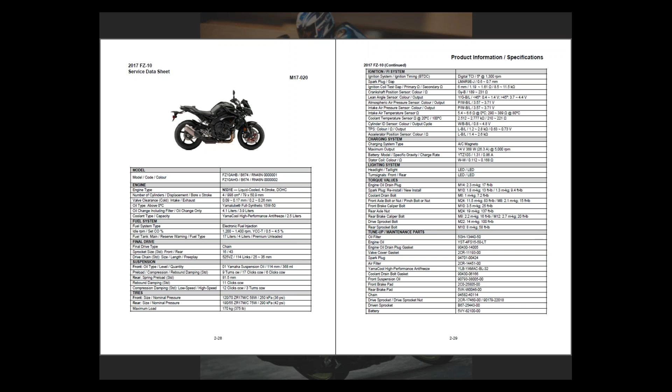In Section 2 is your product information and specifications section. It is unchanged from most other years. You can see a list breaking down each individual model, and it covers your general specifications for engine, fuel system, suspension, as well as tune-up and maintenance parts. You'll notice this year we've changed the order from CC to exactly the same order as the sales list. It's a little detail.

Thanks. Now we'll get into the new model information section. These are the units that we are going to cover: a couple YZs, the SCR 950, the new FZ09, the R1, the FZ10, and the new R6. In your book, this is how you'll see it all laid out. We'll give a quick overview, but we are not going to cover every page within the book. That would take entirely too much time.

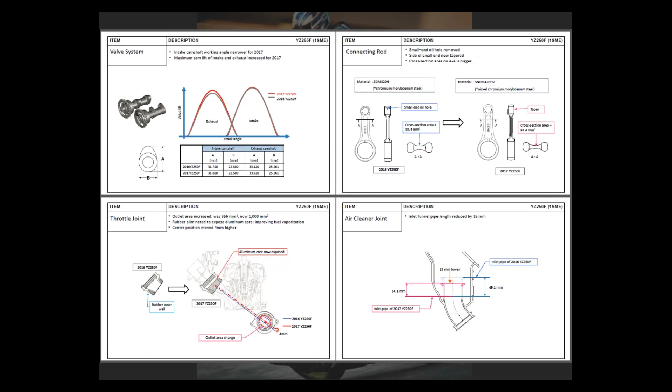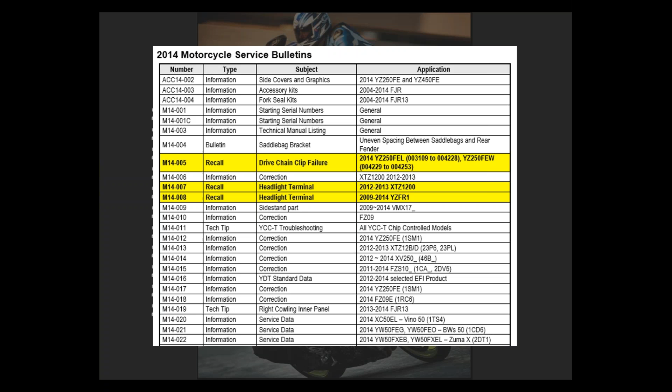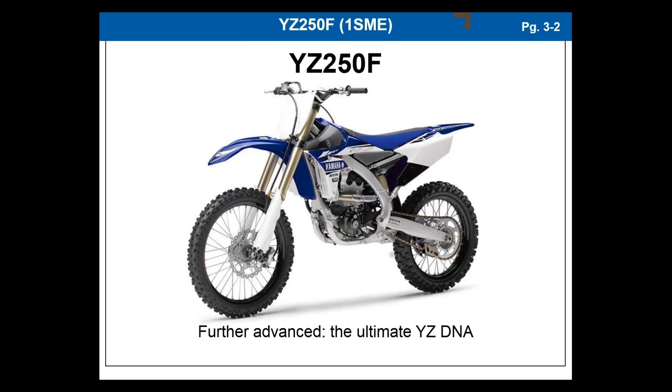Now that we got that over with, we'll move into the new model information. We are going to start off with the YZ250F. A lot of these dirt bikes have been out for some time now, and the new 2018 stuff will be coming out shortly. But we're just going to go through these as a quick refresher to what changes were made for the 2017 model year. So what do we have here, Andrew?

So this is a quick overview of the changes that were made to the YZ250F. Just going around the bike itself, you can see the air cleaner joint length has been reduced by 15 millimeters to improve the high rev feeling. The throttle joint has been moved 4 millimeters higher for more direct airflow. It used to have rubber on it, and that has been removed to improve fuel vaporization. The exhaust diameter and bending radius has been changed to increase mid to high RPM power output. The shift pedal position has been changed to accommodate a new footrest.

The shift cam is changed to improve the shift feeling by adjusting the cam angles in both the in-gear and between the gear shift fork positions.

And the transmission received a few changes, mainly on second and third gear, which were widened because these are the two gears that are used the most.

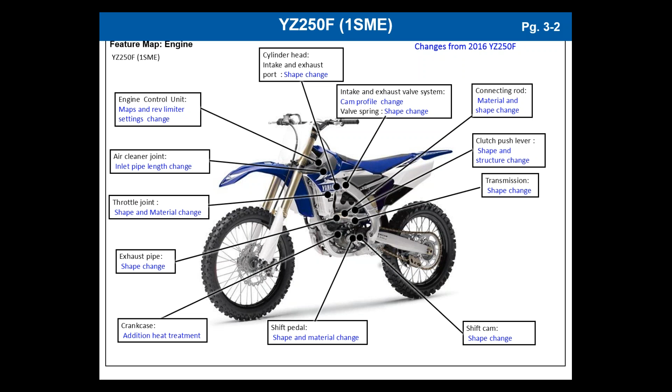The internal diameter of the drive axle is smaller, and the amount of oil holes and grooves have been increased for better lubrication and shifting feel. Finally, the clutch push lever was lengthened to change the mounting angle.

Suspension settings basically change every year, I'm not going to go through that. The engine brackets have been

The connecting rod, the small end, has been tapered and the oil hole has been removed. In 2016, the piston and oil jet nozzle were changed, which allows the oil jet to shoot oil straight at the small end and the wrist pin.

The taper has been incorporated to reduce weight, but also allows more lubrication to get into the wrist pin itself, which made the oil hole unnecessary.

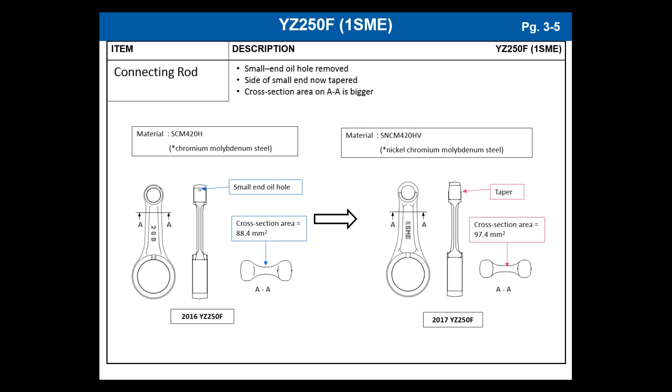After the machining process of the engine cases, a heat treatment is applied which increases the durability. This will improve the longevity of the cases themselves, but the cases are otherwise unchanged and would be able to be used on the previous 2016 model.

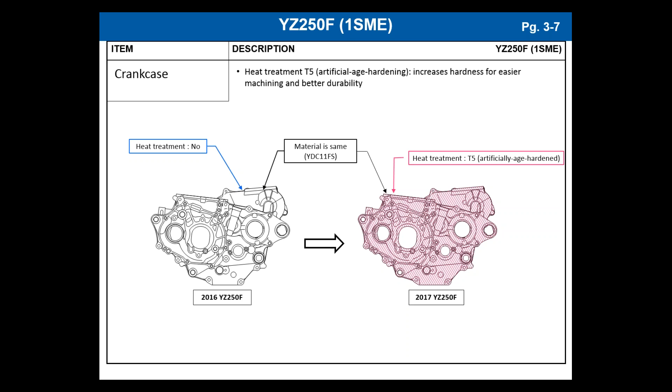Now we'll move on to the YZ450F.

Again, going around the bike, the air cleaner top was changed so that those quick fasteners are now recessed. Riders would catch them on their pants and typically rip them out, so this was changed so that wouldn't happen. The oil strainer has changed slightly at the top for better durability.

The rear brake disc, again, now uses more heat-resistant steel material to match the front disc, and the tread pattern has been changed.

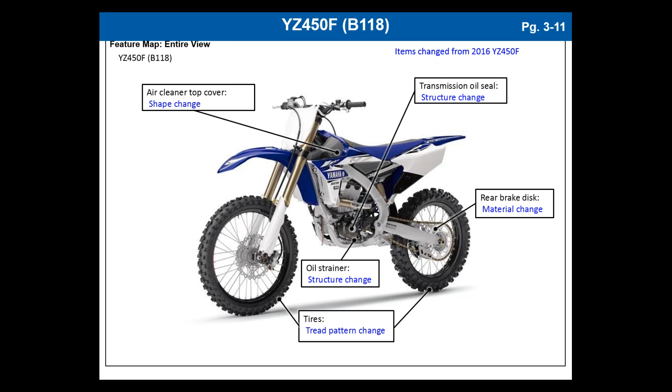This is the one big one we wanted to point out, that the oil seal has been revised to increase the rigidity of the seal body.

So it is even more important that if you're replacing the seal, it does not go in on an angle. Now, Andrew, has that part number been changed? No, the part number hasn't been changed, so it's usable for 2016 and 17. It's just a new spec for the part then, is it not? Yes. Thank you.

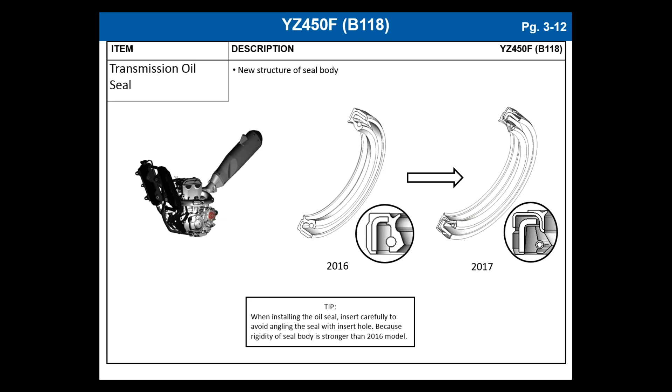Now we have the YZ250FX.

As has been the case for the last few years, the FX makes similar engine changes following the YZ itself. So you can see that there's been quite a few changes, which again had been previously made on the YZ, and we can go over a few of those a little bit more closely.

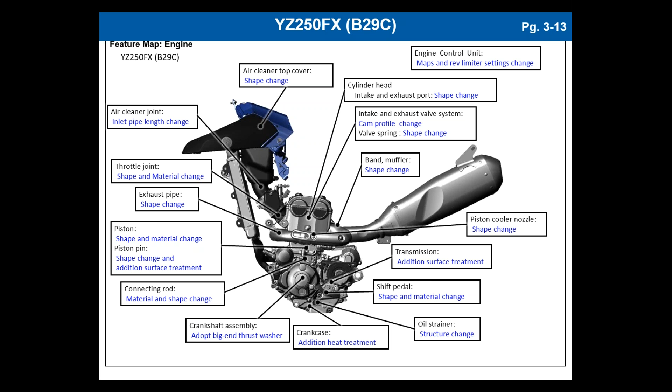But also on the chassis, we've had a few changes as well with the adoption of the WR indicator lamps. The front and rear suspension settings have been revised. The brake disc has been increased by 10 millimeters, which obviously also means the caliper has changed as well.

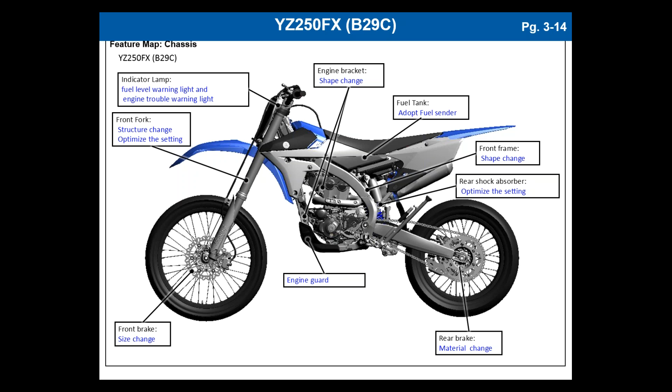The engine guard now comes with the unit, whereas it didn't in the previous model. And the rear brake has been changed, so it's the same part as the YZ, the 2017 YZ. And also the frame is 12 millimeters wider like the YZ as well.

The crown of the piston has been flattened and the ribs have been added on both sides of the wrist pin. These changes result in a total weight reduction of 7%.

Additionally, the replacement duration for the top end has been increased slightly, from replace every 5 races to inspect every 5 races and only replace if necessary.

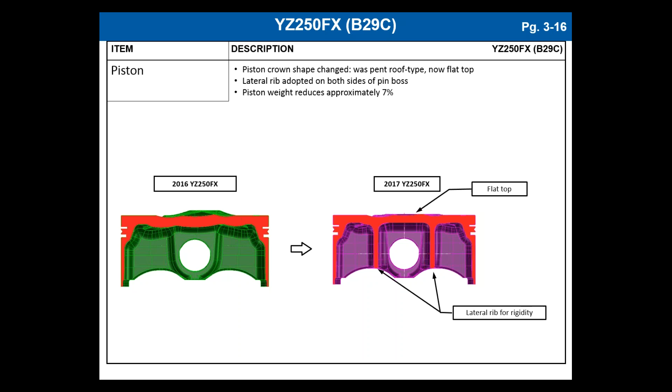So these were the nozzle shape changes that the YZ had on the 2016 model year. Here you can see the oil, where the oil jet shoots more directly to the center of the piston.

This is important because the piston shape changes to get around those ribs, but also directs the oil where it's needed the most, right at the wrist pin.

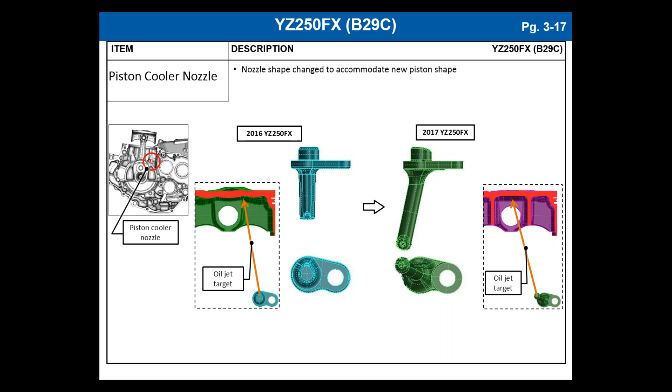So the connecting rod has been changed and is the same part as the 2017 YZ250F, with the tapered small end and the removal of the oil hole.

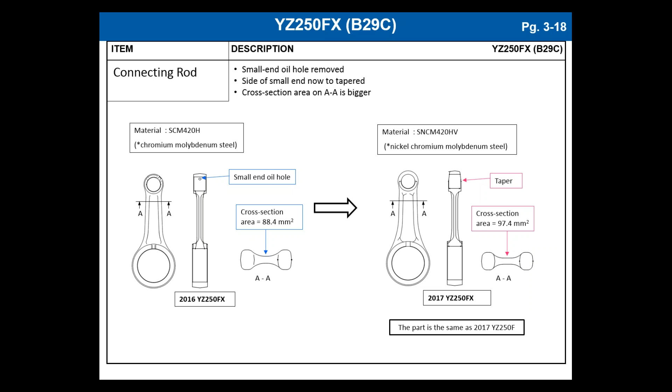On the crankshaft, thrust washers have been added between the connecting rod and the crankshaft for improved durability. These and all crankshaft components are available for purchase individually.

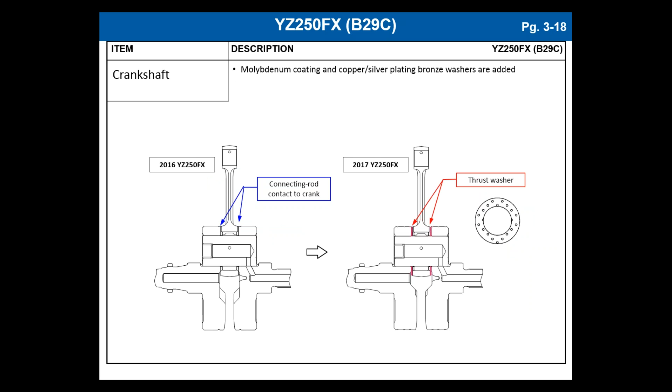The Kickstarter system has been eliminated, which frees up quite a bit of weight. But the kit itself is unchanged and is available as an accessory if the customer would like it.

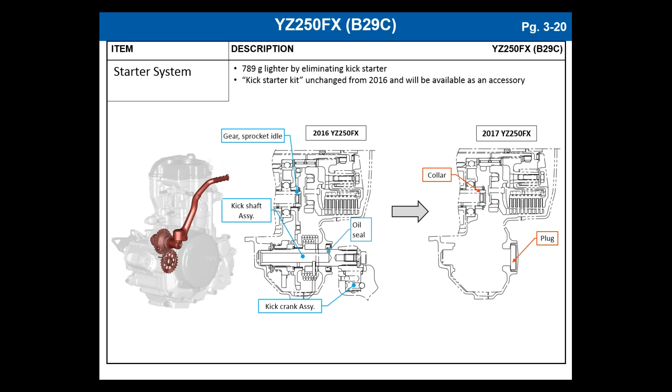Because the Kickstarter has been removed, there's now an exposed area of the exhaust. So the muffler band has been added just to protect the rider's clothing from contacting the exhaust.

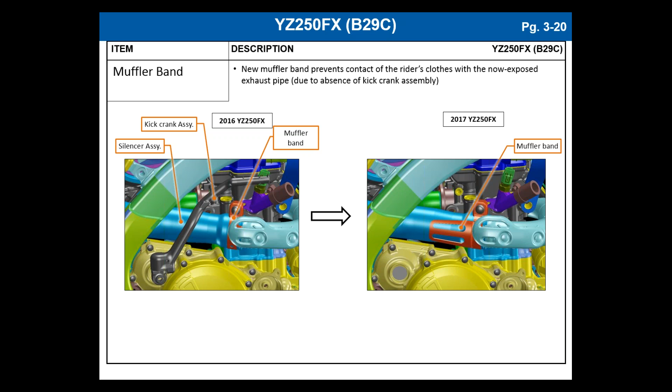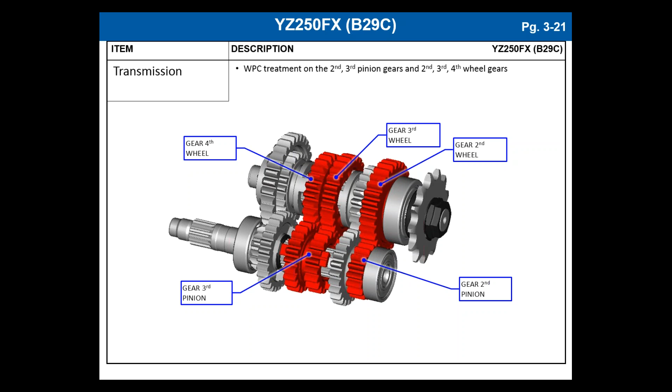The FX is a cross-country racing bike. So unlike the closed course YZ, the likelihood of the FX encountering large mud holes is pretty high. An additional scraper has been added to the front forks to improve cleaning performance and reduce seal wear.

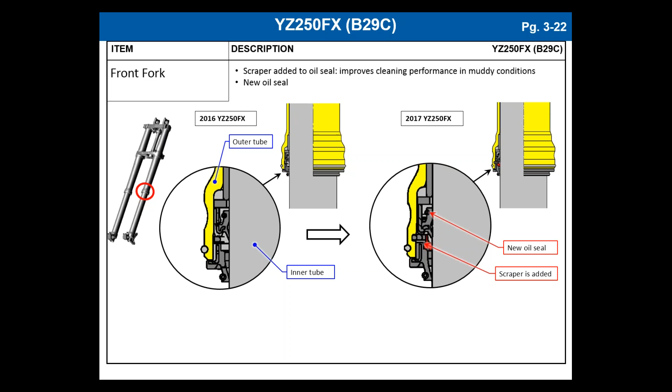So we'll move on to the SCR 950. So what do we have new there, Andrew? There's a few things new. This bike will be compared quite a bit to the Bolt C-Spec because that is the outgoing model, and these are sort of the same genre of motorcycle, I believe.

So as you can see, they have the steel handlebars with crossbars, so it's sort of that off-road look. The same Speedo that was on the C-Spec. You have the front boots over the front forks for that look. The steel front fender, the knobby-like front tires, wavy front disc, uses the same frame as all the Bolts.

So our customers will get the benefit from the low maintenance belt drive then as well. That's good, that's right. That's always a benefit. Like the C-Spec, it has that slim, flat-shaped seat with the addition of those retro-styled side covers. Of course, there's a new frame to accommodate that seat.

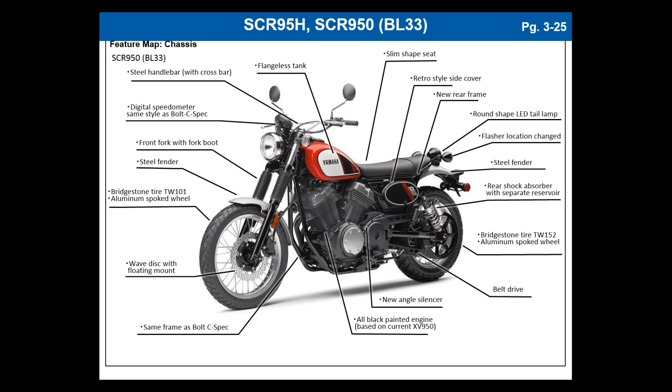LED tail lamps, the flasher rear signal location has changed, and a steel rear fender, the rear shock absorbers with a separate reservoir, and the new flangeless tank, which is on all the Bolts.

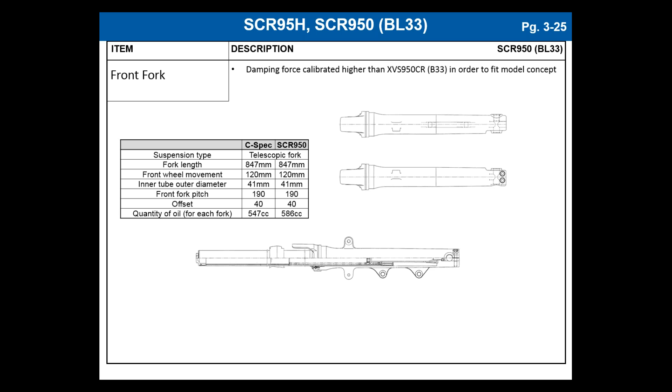The front forks are largely unchanged from the C-Spec, but one thing we wanted to point out is the quantity of oil for each fork is up a little bit. So just keep that in mind if you are rebuilding these forks.

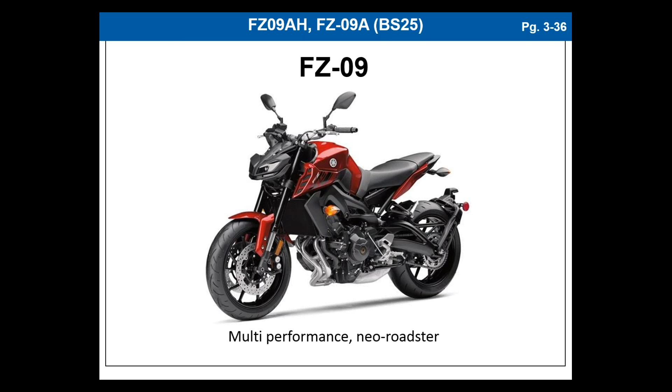Here we have the new FZ09. So the engine is largely unchanged from the previous generation. A common thing that you will see throughout the next few motorcycles is this EU4 regulation. This is a new emissions standard from Europe, and it is one of the highest to reach, and as part of a globalization of all these models, all the motorcycles will adhere to these standards.

The new features of this bike are the addition of the assist and slipper clutch, an available quick shift system. The new muffler protector is more for the look. The chain case cover has been redesigned to accommodate that quick shift system. The resonator has been eliminated inside the airbox. There's a force-feed lubrication type tensioner, and there's a newly designed oil cooler.

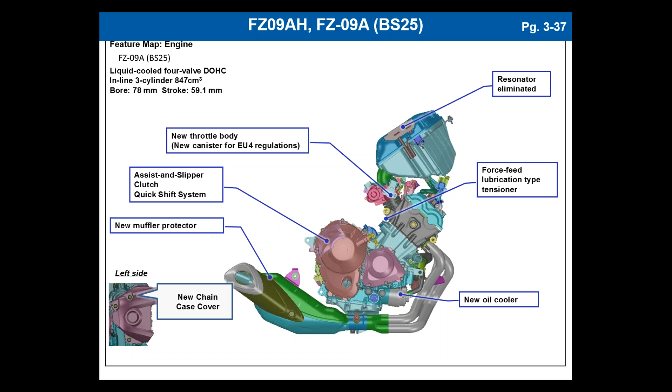There's a lot of information there, Andrew. Tell us about it, please. So as you can see, compared to the previous generation, the weight of the bike is up just a little bit, by 5 kilograms, but it is quite a bit different.

It's got a new speedometer, new LED headlights, the signal location has been changed, the adjustment is now on the left fork, there's a new speed sensor layout for the ABS, there's a new rad cover, there's a new canister, because again for that EU4 emissions standards, the available quick shift, which is for upshifts only, unlike the R1.

There's a new footrest bracket, which incorporates some heel guards. There's a new tail side cover. The driven sprocket surface treatment has changed. The side reflectors have been added. There's that new style mud guard hanging out off the rear swing arm. A new LED tail light design and a new rear frame.

For us, on the service side, the important bit is that the YDT version 3 is accommodated and is under the double seat. And there's, again, for that EU4 adaptation, an OBD generic scan tool accommodation. So this generic scan tool, Andrew, does that mean that any dealer, any shop will be able to work on the FZ09 the same way a Yamaha dealer?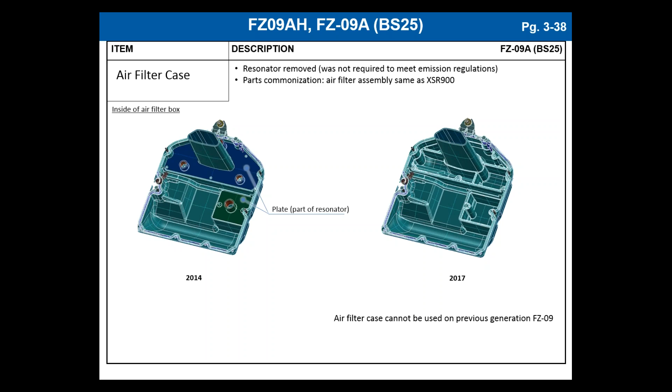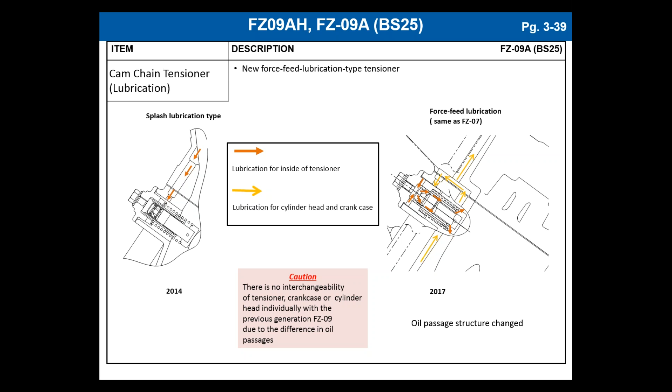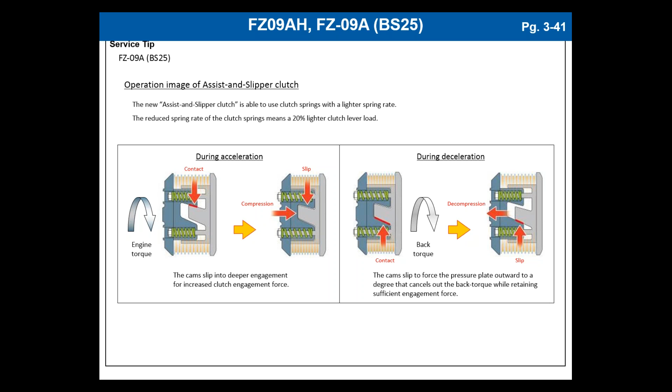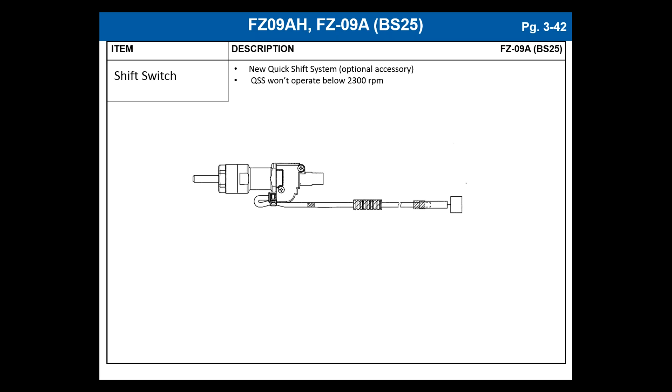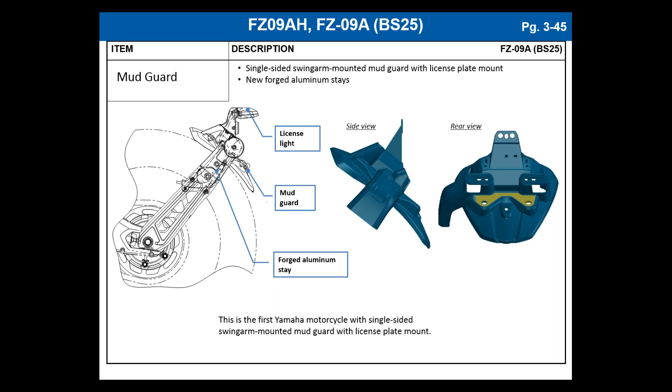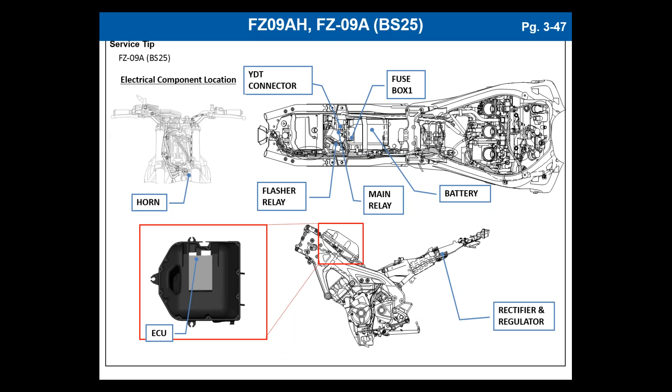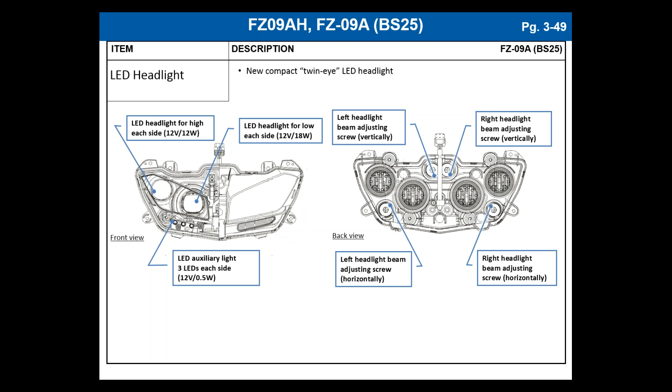Well, I had one question for the FZ9. When should the YDT connector be used? Is it like a PDI or? Any bike that has YDT moving forward is YDT3 compatible. It should be used during the PDI to set up the bike, just to ensure that there are no history fault codes within the unit, and also to input the VIN number. And so this information gets stored in the cloud? It gets stored, written to the ECU. And the history of any bike in version 3 now can be saved on the cloud and then accessed by any other dealer, so that a customer anywhere around the country or elsewhere can have access to the information. That's right. Once the computer is hooked up to the internet, it is automatically uploaded. That's not something that the dealer has to worry about. Very good. Good information.

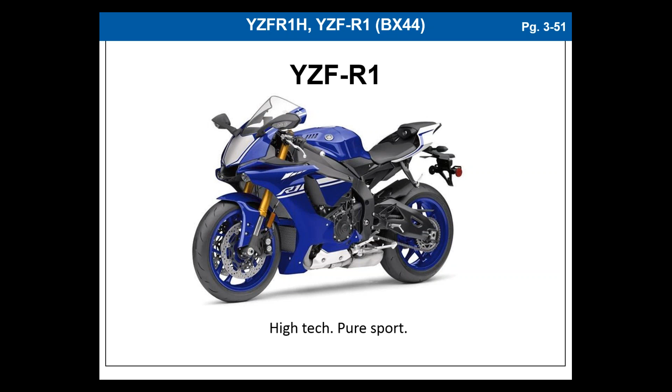So next we have the R1. There are only a few changes made, mainly being the dash itself. The valve springs have gone from a single to a double valve spring type. The CAT has changed a little bit, and the ECU settings have changed.

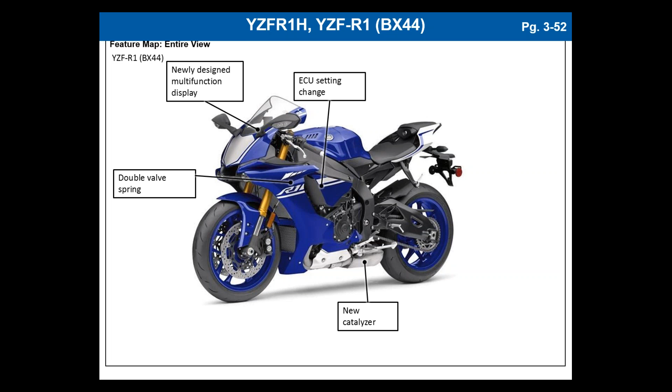Here you can see the double valve spring setup. Previously it was cupped and just had a single spring to prevent that side movement. They've eliminated that cup and added that second spring inside. An important note: still use the 2CR type adjusting pads. They are a more highly polished finish, and it's very important that these are used on the R1.

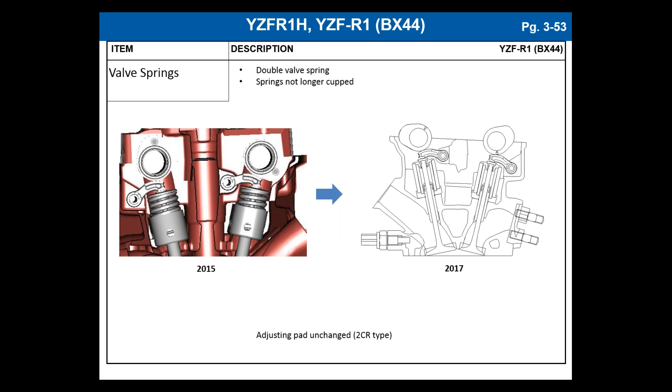What about the catalyzer? Again, with that EU4 compliance regulations, more catalyzing agent has been put into the exhaust system itself, but the actual exhaust hasn't changed.

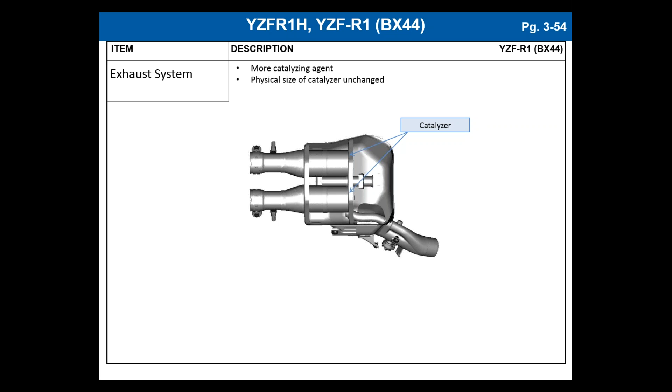Front forks are mostly unchanged, but one important change is that they've changed the preload nut, going from an uncommon 35 millimeter size to a more common 36 millimeter socket.

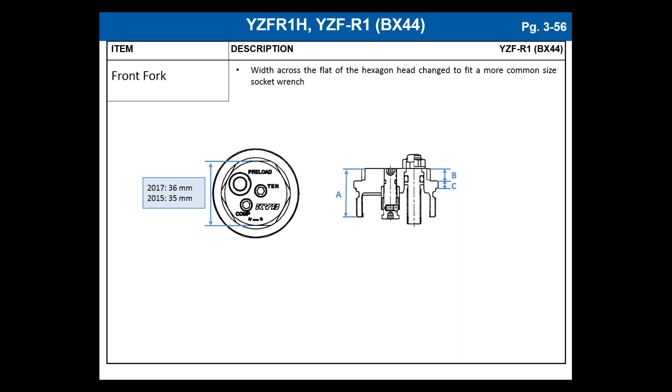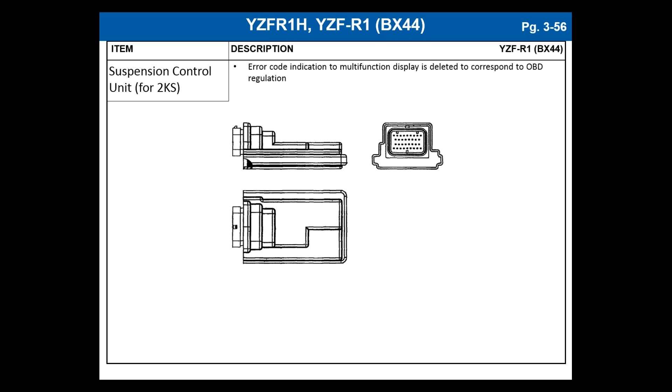Suspension control unit: one of the regulations for EU4 is that error codes are not allowed to be displayed on the dash. All it can do is throw an engine code, so the ECU has been changed to accommodate this.

More on that, the caution displays have been changed. You can see at the bottom the OBD regulations, the fault code display is prohibited. Therefore, the malfunction information for each device can be indicated only by a symbol or a caution light.

New rules for our market, eh? That's right.

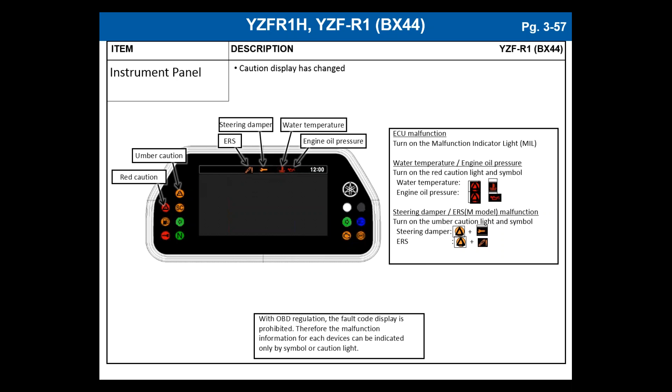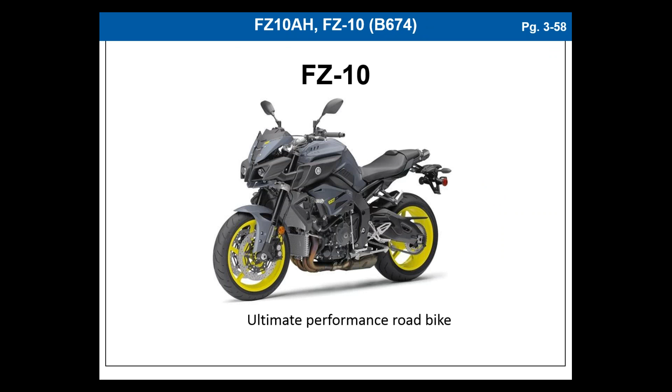So the FZ10. This guy was an early release, so you definitely had him around a little bit and probably had your hands on him and had a good chance to ride it too, which is always fun.

A lot of this bike is based off the R1S, but also made its own changes. You have a lot of LED lighting in the instrument panel, position lights, headlights, and an electronic steering dampener. The lower crown is its own.

LED turn signals, the KYB front forks, the aluminum 5-spoke front wheels based on the R1S, the 4-pot monoblock calipers, aluminum front peg brackets, a new sprocket, aluminum rear swingarm, again KYB rear suspension, and that double seat with the hip stopper for the driver, which is a nice comfortable addition.

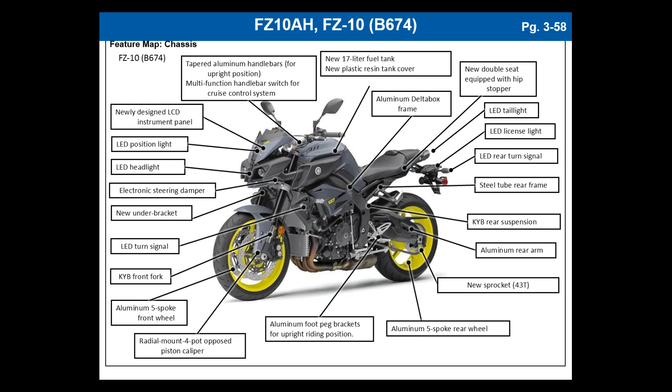So again, the engine is based largely on the R1, with some changes being new intake valves changed from titanium to steel.

The compression ratio has gone down a little bit. The crankshaft has increased inertial mass. Again, to accommodate that, the ACM has been increased. The exhaust pipe material has changed from titanium to steel.

The oil pan is aluminum versus magnesium, which is on the R1. The chamber has changed inside the exhaust, a smaller silencer, a new diffuser with EXUP. The crankcase covers are aluminum instead of magnesium, and there's a larger capacity air cleaner.

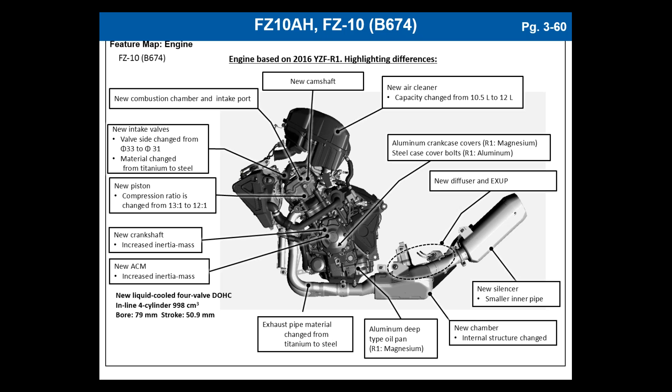This bike is designed to be more of a street riding bike versus a track bike, which is a big part of these changes.

The new cross-plane crankshaft is based on the R1. It has a thicker taper on the end to accommodate the increased weight of the rotor assembly, the ACM. The idea again is for improved streetability of the bike, so it doesn't fall in RPM quite as quickly when you're in traffic.

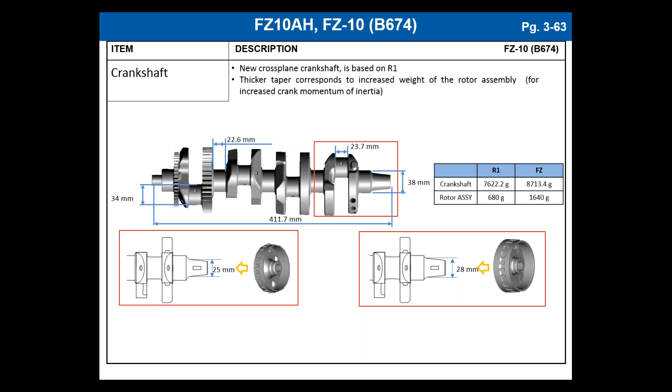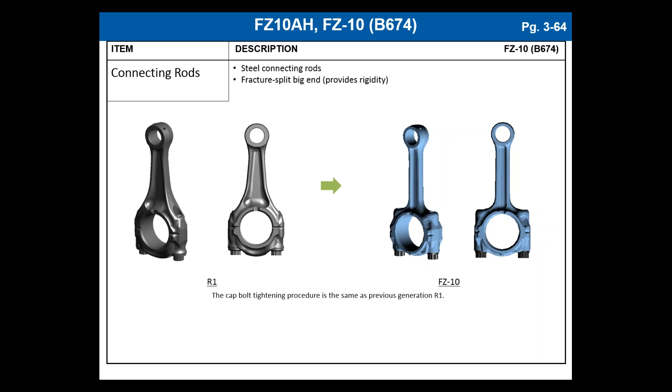It features a steel connecting rod with a fracture split big end, but the cap tightening bolt procedure has not changed.

It has new forged aluminum pistons, new piston crown design, and also the piston pin circlip has been reduced, so you do not need to use that R1 special tool to install it.

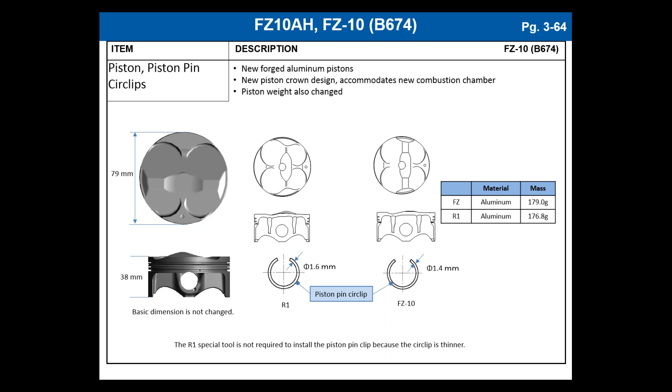The engine oil is definitely the same recommendation as the R1, using the Yamalube full synthetic. And there's your oil filter part number, the 5GH50.

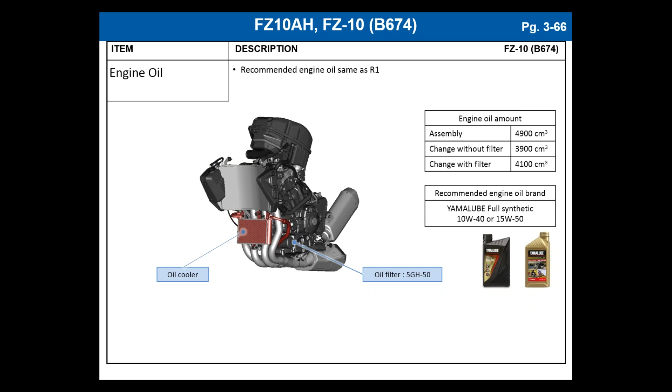The air filter: it's a new air filter case with the viscous type air filter, which is a common part with the R1. The FZ does not have YCC-I, which helps reduce weight and production cost. The airbox capacity is up a little bit more than the R1.

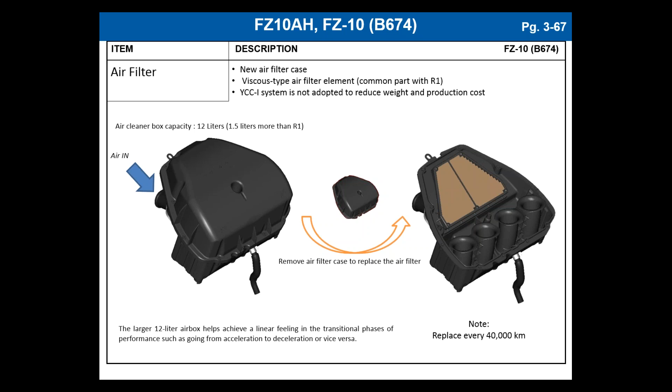It mainly helps achieve a more linear feel while riding through acceleration and deceleration, because again this is a street use bike versus a track bike. Note that you want to replace this air filter every 40,000 kilometers, or sooner if you ride in very dusty areas.

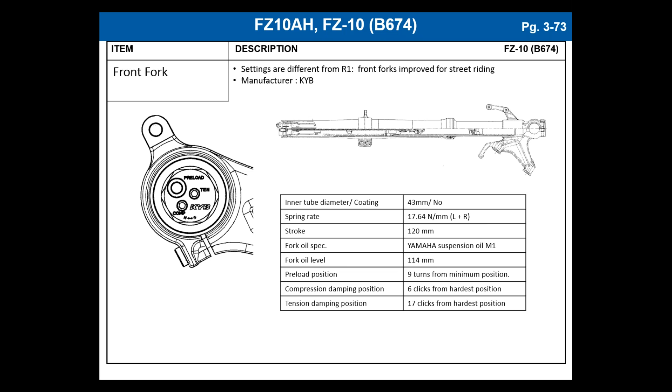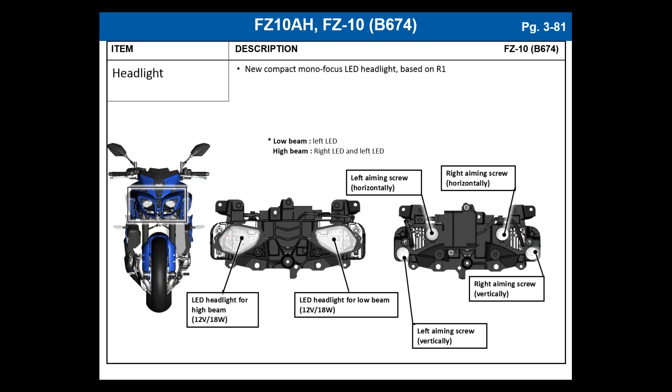The headlights are those LEDs, which are based off the R1. Your low beam, as you can see, is on the left side, and the high beam is both. The adjusters are on the back, and these are not serviceable items; they have to be replaced as an assembly if one goes wrong.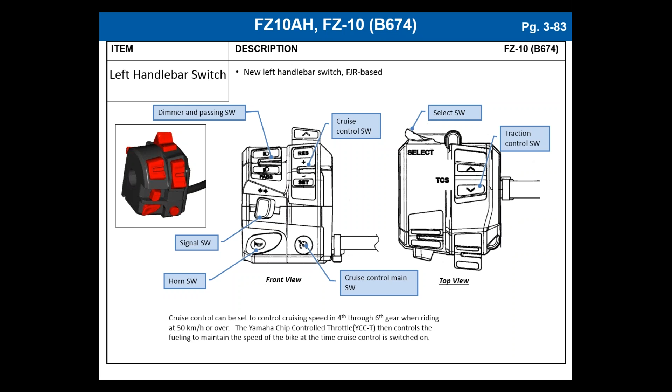Here's the electrical parts location. It's largely in the center of the bike. The HU is your hydraulic unit.

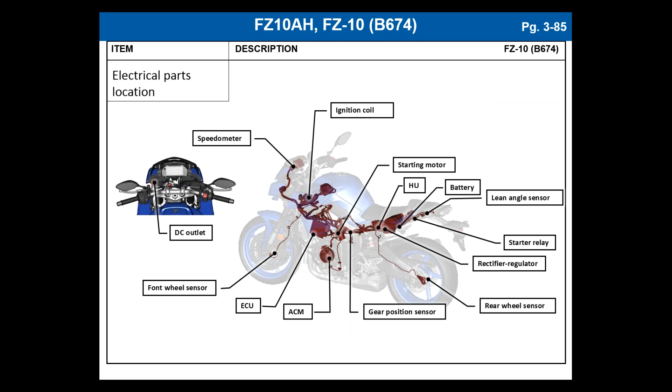Next we have the D-mode differences between the FZ models. As we know, on the FZ if you have your standard mode, you can switch it to B mode, which is more like a rain mode, it's less sharp, up to your A mode, which is your sportier version. On the FZ10, standard is the lower of the settings, A is sportier, and B is the sportiest. This is more in line with the R1 power levels in your D mode.

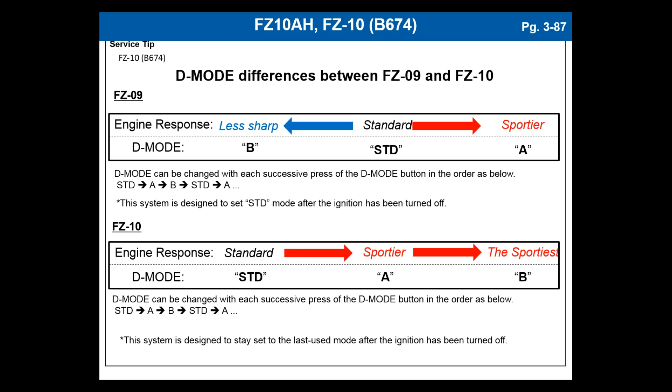Again, your YDT tool connector is located under the double seat. It uses CAN communication, which is very important to allow multiple ECUs to communicate at a very fast pace. There's also the active test, which is available in the YDT version 3.

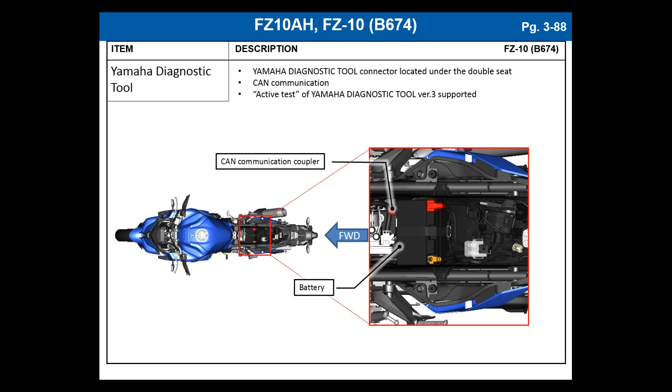Next we have the R6. As you can see, the engine is largely unchanged. When you have a good thing, you don't want to change it. So we've expanded the AIS ports. There's a newly designed smaller ACM and the addition of a gear position sensor.

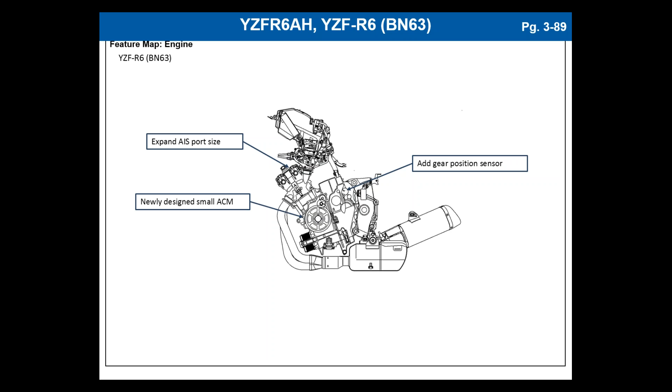Of course, on the outside, there are quite a few changes. You have your R1 based forks, R1 type rear view mirrors with integrated signals, and that new LED headlight just like the R1, except tucked back a little more. There's new auxiliary lights, a new front brake system based on the R1, again the R1S type front wheel and rear wheel, and ABS is added. Quick shift is available as an accessory. We have the rotor sensor at the back, a newly designed rear shock absorber, R1 type signals in the rear, a newly designed ECU with traction control and D modes, an R1 style taillight, a new rear fender with flow-through holes just like the R1, a new narrower rider seat, a new aluminum fuel tank, and the new instrument panel.

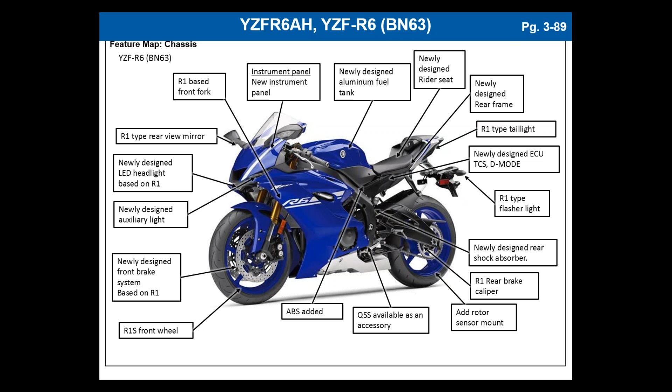Here you can see in the crankcase the addition of the gear position sensor. It's added on the right side of the upper crankcase.

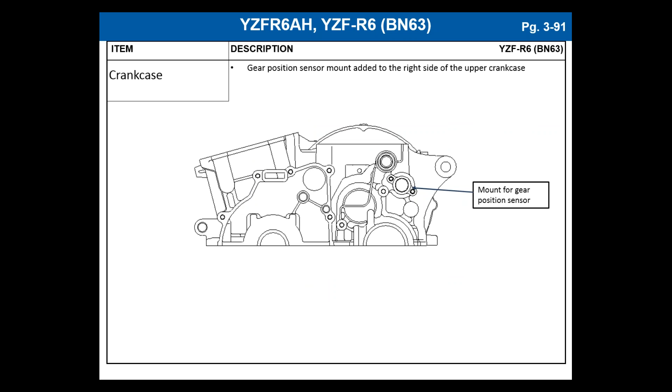The ACM's volume has been reduced in order to save weight, largely due to the fact that we don't need as much power because everything is now LED. And reduced weight means a faster revving engine.

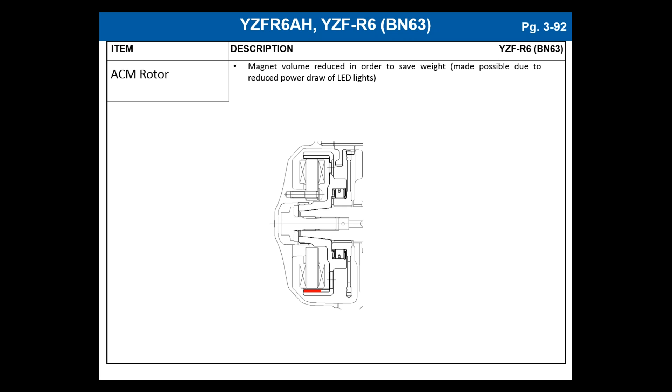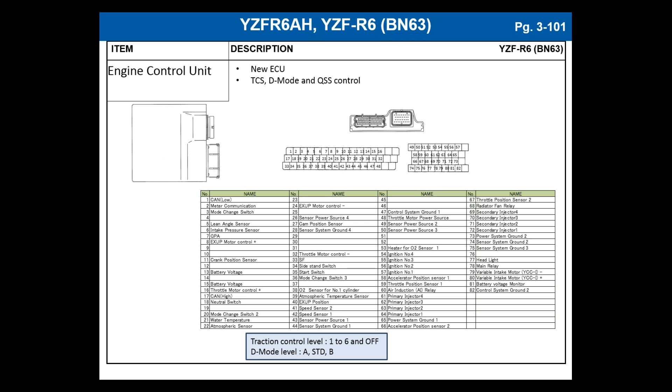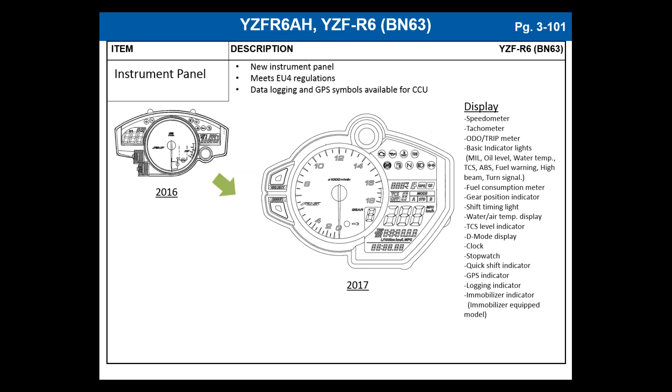Some guys have been a little confused with the step up in power level from the D mode to standard, and then A and B. Keep in mind that this is based off the R1 and uses the R1 CCU basic groups. Because it has the R1 CCU basic groups, it must have the same step-up power level progression as the R1 did. So though it only has 3 levels like other models, it has that change in the way the system functions, with standard being a mid-level, then a low level and a higher level to follow. It would be nice to have that exactly the same, but we are at what we've got. That's been the biggest issue.